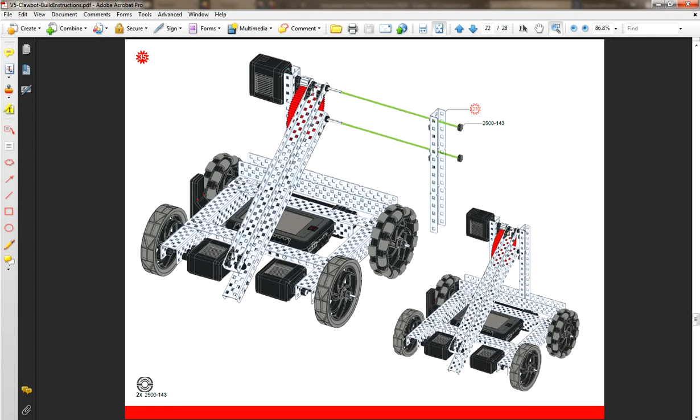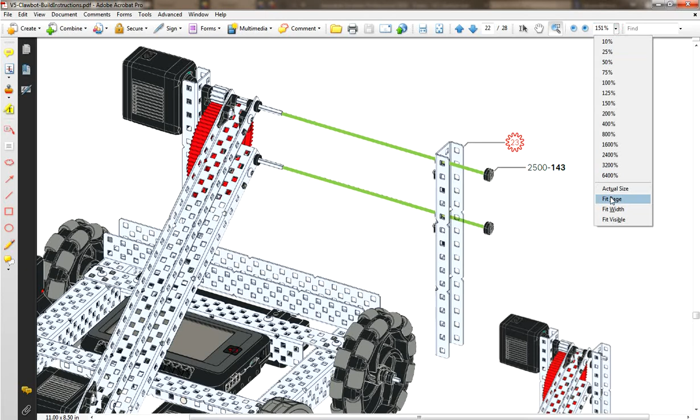This video is going to complete the tower and then add the claw on the end of the arm. As you can see from the instructions, we need to bring our tower assembly in, align it on these two axles, and add shaft collars on the outside. Then after we do that, we will need to affix and add the bolts and the retaining posts to the bottom of the tower like we did on the other side.

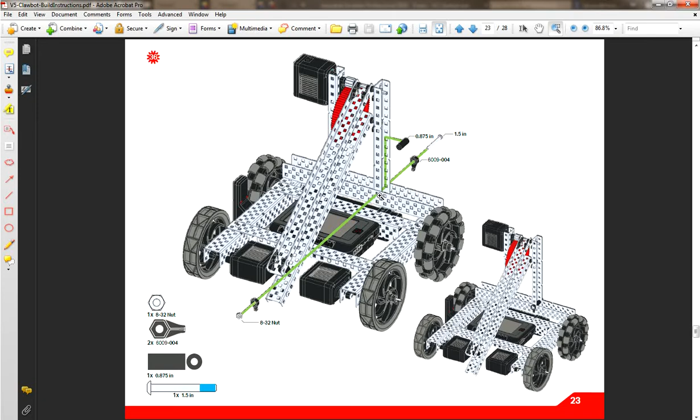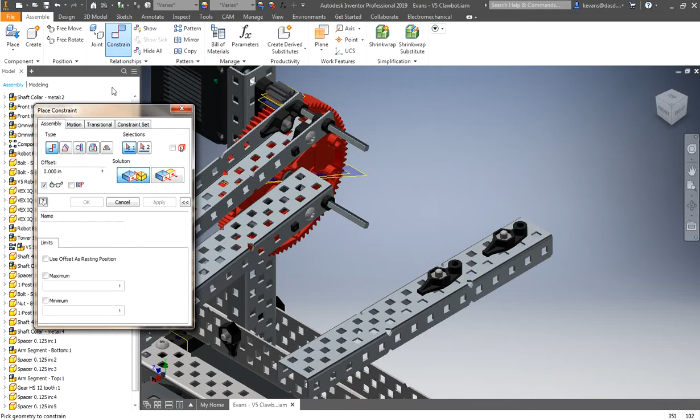So in Inventor, let's begin by bringing in our tower section. This is the left tower side. Bring that in. Now I need to align these with the posts here. Just do a mate constraint on the center lines of the hole and the spacers. It's the easiest way to line that up.

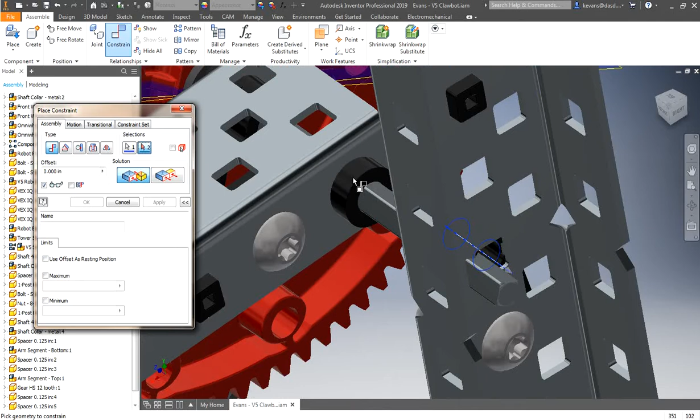You can swing that around a little bit, move it around, change my view a tiny bit, and do the other one. Once I have the second one in there, change my solution so that it accepts it. Now this moves any which way I want.

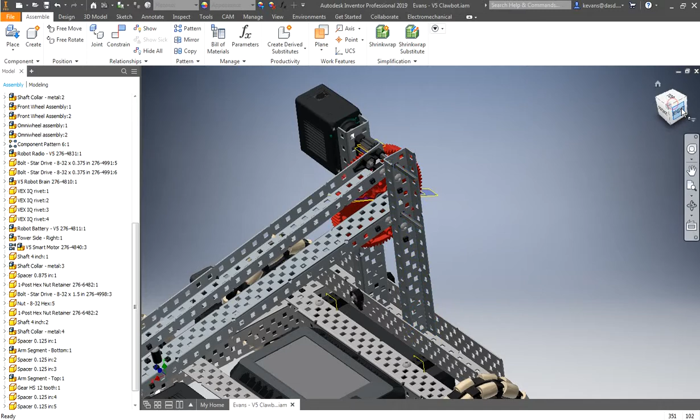Now you might think you want to push this all the way in to be snug against this piece, but what you really want to do is make sure it's lined up to the proper holes so that you can get the bolts into the holes properly. Okay, now if you look, it looks like that comes close to lining up, and that helps you see which holes you need to line up to. Let me change the view a little bit.

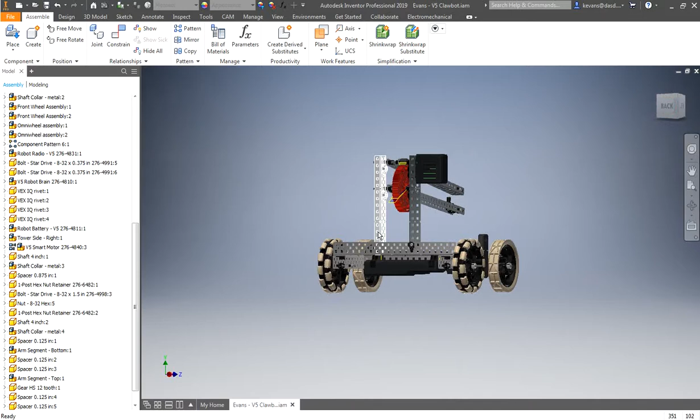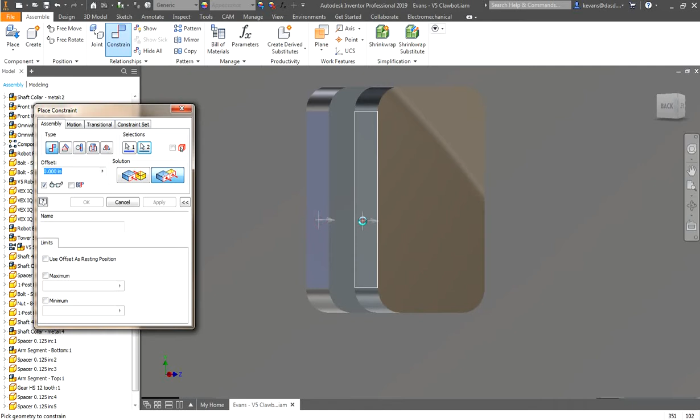Now, this bar currently slides in and out because it's just over the axles. If we want to lock it in place, we just need a flush constraint between these two surfaces. So constrain, change it to a flush versus a mate constraint. Select that, and that snaps into place. And now that side of the tower is constrained. It cannot move. We picked the proper holes. There's a little gap here. Had you used the spacers, it wouldn't have locked in properly down here.

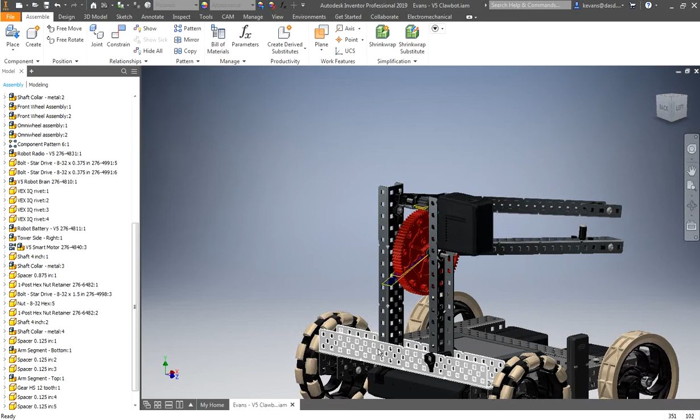Now we also need to bolt these in like we did this side, but it's an identical assembly to what was over here. So if I can select all the parts that we used over here - the bolt, the nut, the spacer, and the two one-post retaining clips - we can just make a pattern.

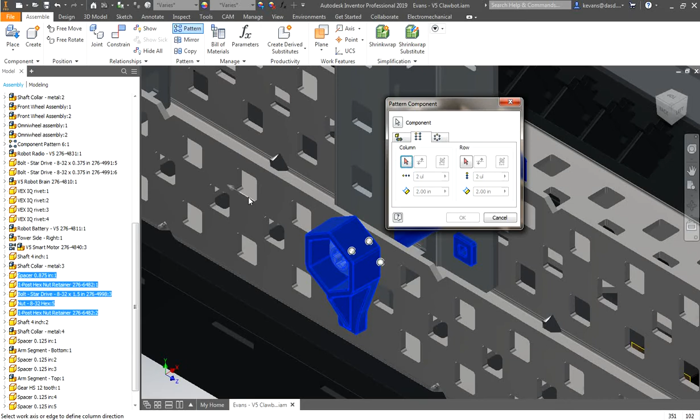We can make the pattern go that direction, and I think we need another inch. Yep, so instead of 2 inches, 3 inches. It's exactly where we need it. We click OK, and we have the bolts we need on that side.

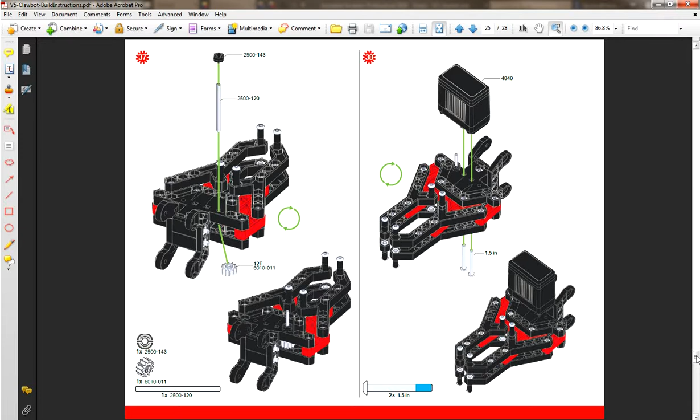Moving on to the claw kit. The instructions have you assemble a motor into the basic claw kit, but the assembly that we have in Autodesk Inventor already has the motor attached to it, so we don't need to do that. We do, however, need to place the claw onto the end of the arms.

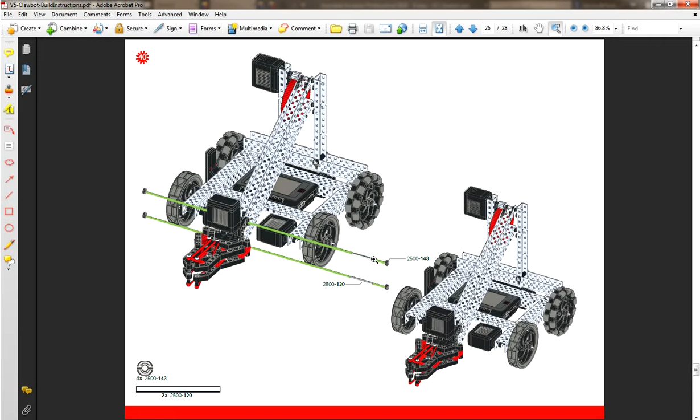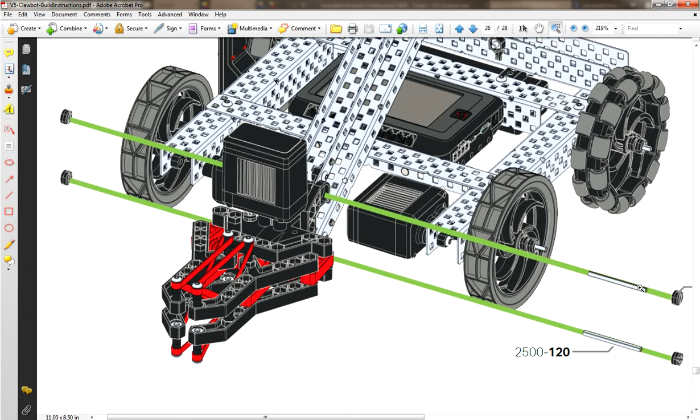Now, the original instructions had you use a shaft with friction collars on the ends. It's a horrible connection, would often come loose. The bare minimum in class, I recommended you use the locking shaft collars, the metal shaft collars, and you might even want to switch it to a bolt and a nylock. I'm going to assemble ours in Inventor with a bolt and a nylock. If you wish to use a shaft and two of the metal shaft collars, feel free. Depends on which you did in class.

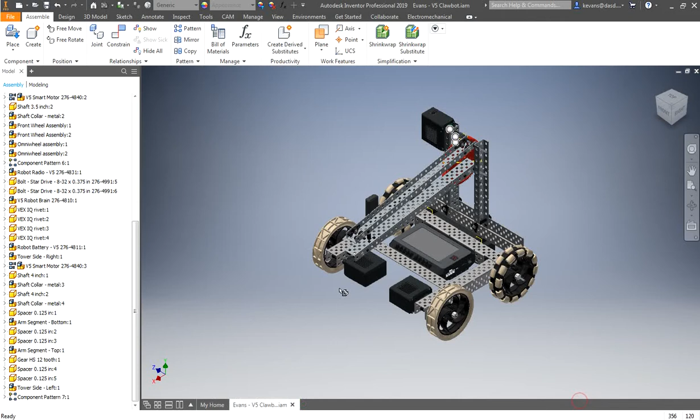So the claw is in the motion folder. It is called Claw Kit V5. So I'm going to bring the claw kit in. As you can see, it has the motor attached to it. You can bring it up near the front.

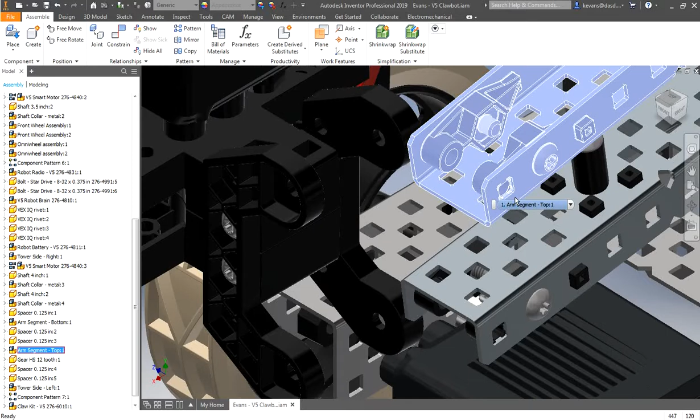Now there are some iMates where we need them to be. We need to lock it in to here and here. Now the arms don't have the iMates, and they don't have curved surfaces on the outside. Well, it means we can't use the iMates. But it's no harder than constraining one side to one of the sides, like such. Change your view, go back, show you what that did.

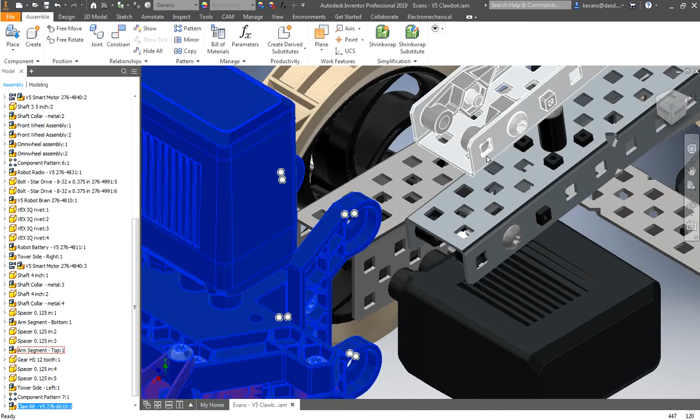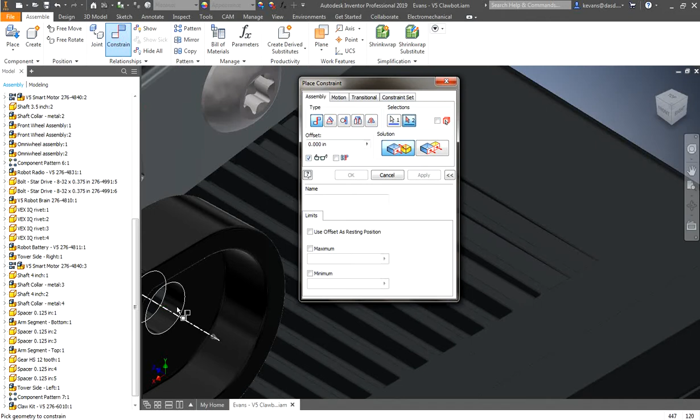Now we just have to line up the centers of this hole with this, and this hole with this. So constrain, leave it on mate, pick the center line. We're just lining up the axes. Change your solution. And do the same down at the bottom to line up the next one. Constrain. Get it out of the way. Pick the two. Edit the solution. Click OK. Now it is constrained in place.

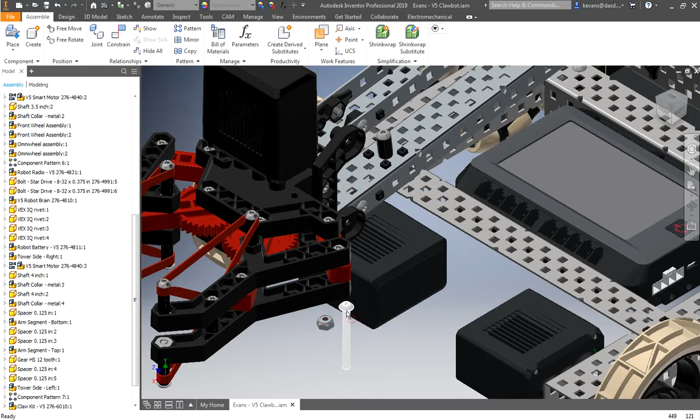We need to add the bolts. To secure the claw to the arm, I believe we need an 1.5 inch bolts. So we'll go to the structures folder, pull up the 1.5 inches. I also need a nylock. It's the best choice. Okay, we can just use an iMate, snap that into place.

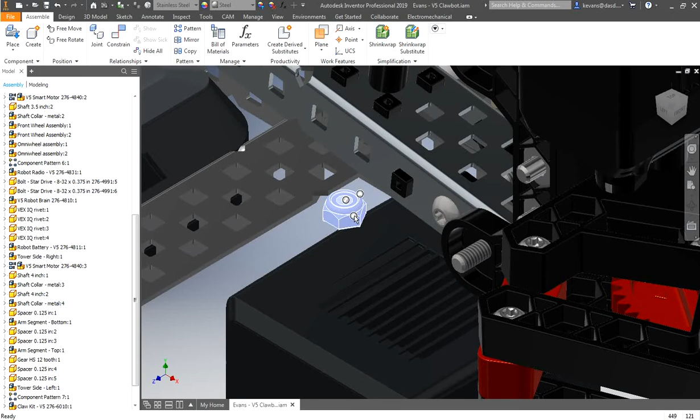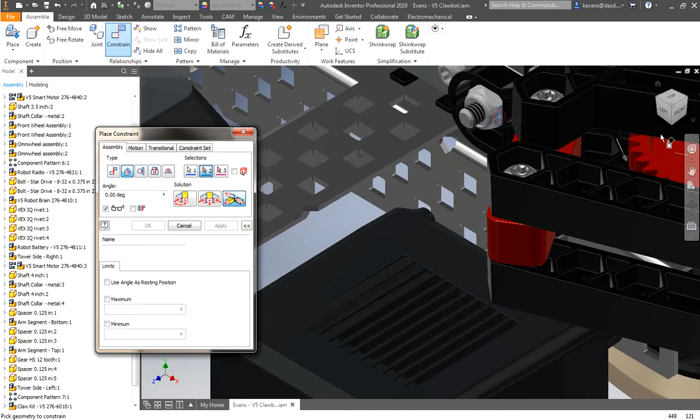Swing around to the other side and secure the nylock. To lock the nylock in place, we need to add an angle constraint to the sides of it. But we can't use the sides of the plastic claw as they're slightly out of plane. However, we can change our view, zoom in underneath, and lock it into the end of the C channel.

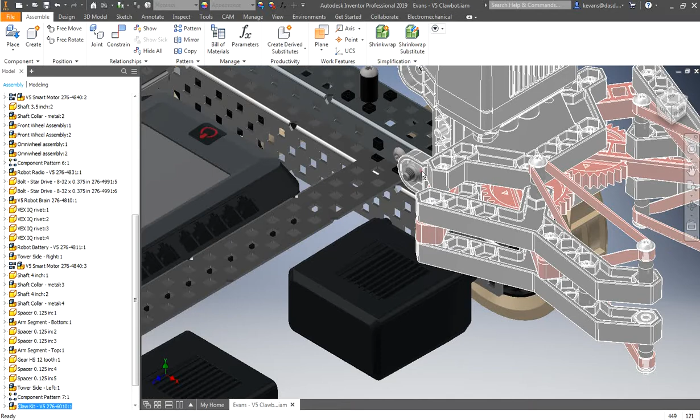Okay, with that, that nut will not move. Well, it moves up and down with the arm, but it does not rotate.

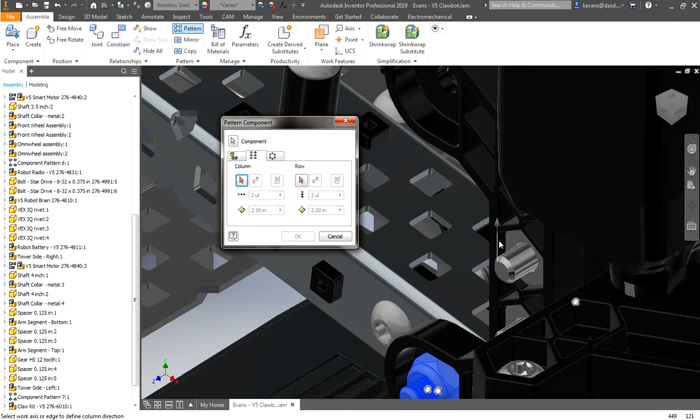Okay, we need one more nut and bolt combination. I'll select them both and just make a pattern. We'll move it up along the claw 2 inches, puts it perfectly in the other hole.

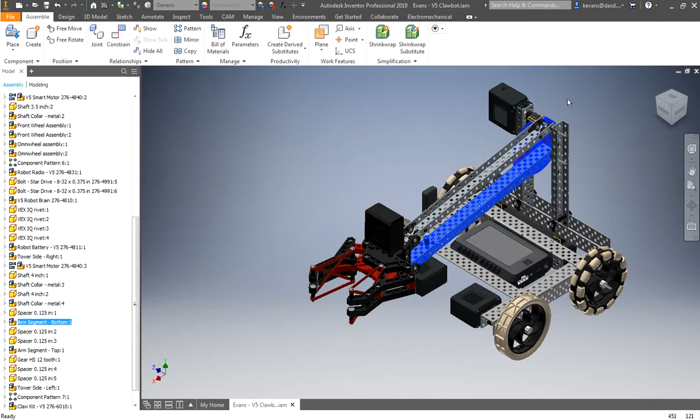At this point, it looks like we have a completed model of the clawbot. The wheels will turn, the arm is constrained and moves up and down. There's just one more thing we really need to do. If you notice at the top of the arm, when it moves, the gears don't move in sync. And that's an easy thing to do, we should probably address now.

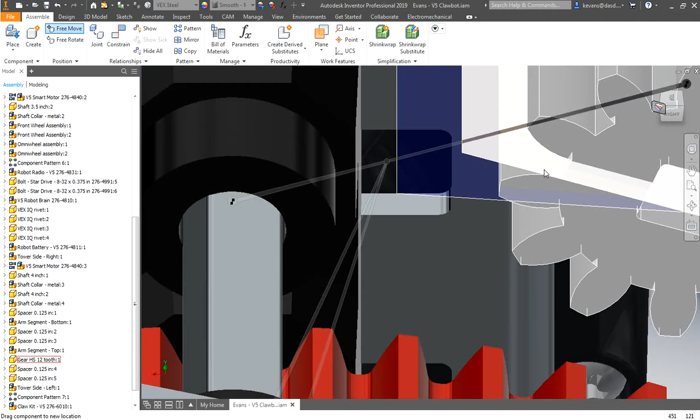These planes that show up on the gears are there for a reason. Okay, let me pull this out, we can take a look at it. You can see one of them goes through the space between the teeth and one goes through the middle of the teeth. Same thing on the larger gear down here.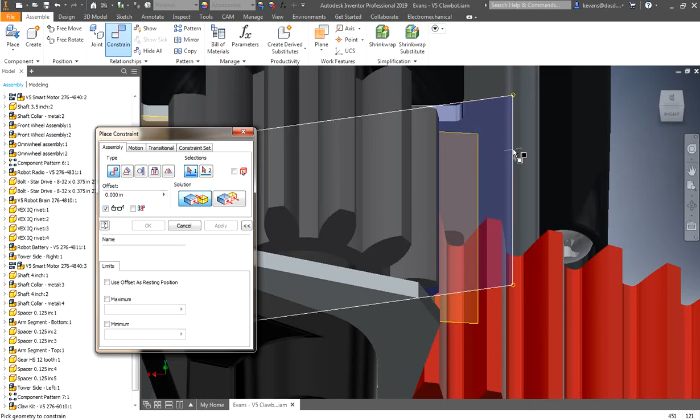We can simply align those planes. So, oops, not joint, I need to constrain. I'm going to pick one of these planes. Let's pick that one. Now if you look closely at that, that is the plane that goes through the middle of the tooth. So I need to pair it up with the plane that goes through the middle of the gap on the large gear.

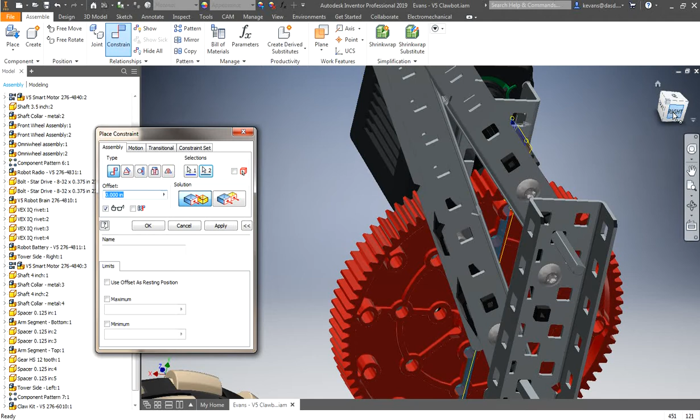Now the teeth are lined up. However, they won't move. Well, there's a way around that.

Got to find that last mate. That's this one. Actually, it'd be easier to find it off that 12-tooth gear. There's less right there. It was mate 25. You see the planes lighting up. I'm going to double click on the name, and I'm just going to change the name of this to Gear Align, just so we have reference to it and can find it.

Okay, I am going to add another constraint. This is called a motion constraint. So we go from the assembly constraints to motion constraints. And this allows things to rotate together. I want the gears to counter-rotate, so I need to click the reverse solution.

Click somewhere on the gear so that I get that curved open loop. So I'm going to click on that face, and I'm going to click on that face. Now, this isn't a 1-to-1 ratio, it's a 7-to-84 ratio. Or, a 12-to-84 ratio, which reduces to a 1-to-7. So, 12 teeth on the top gear divided by the 84 on the bottom gear. Or you could do 1-to-7.

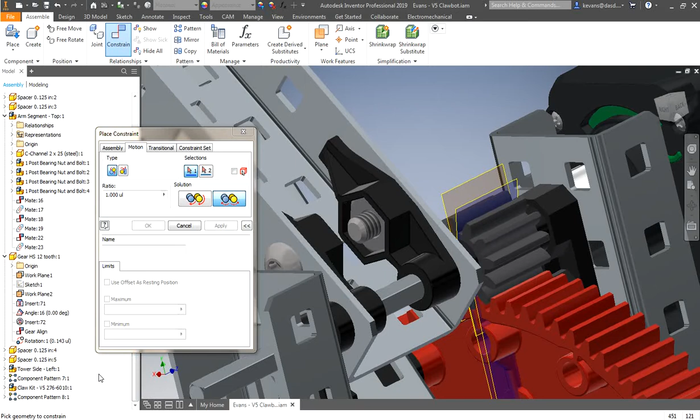Going to apply it. Now, it still won't work because it is still locked in by the gear align constraint. We simply need to go back to that, and I don't want to delete it. If we ever need to bring it back for some reason, it'll be here. We're going to right click and suppress this constraint. It's there if we need to unsuppress it, but it won't be used.

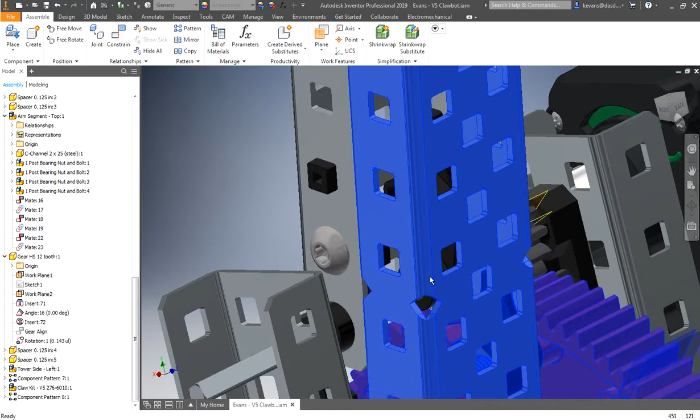And now you can see when you rotate, they rotate together and the teeth stay meshed.

Now, the only other thing really to address is the fact that you can see these work planes that we use. We could find the parts and individually go in and make them non-visible, but we can also just go to the View tab, and on the left there's an option called Object Visibility. It basically is where you select what you want to see in your window. I want to turn off User Work Planes.

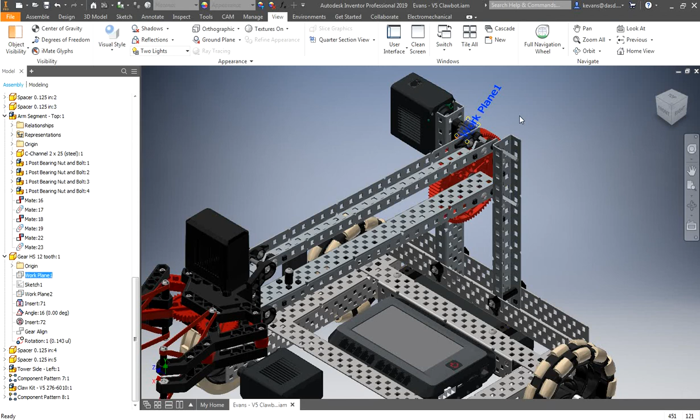And as soon as you do that, you will not see any of them. And there is our completed Clawbot.